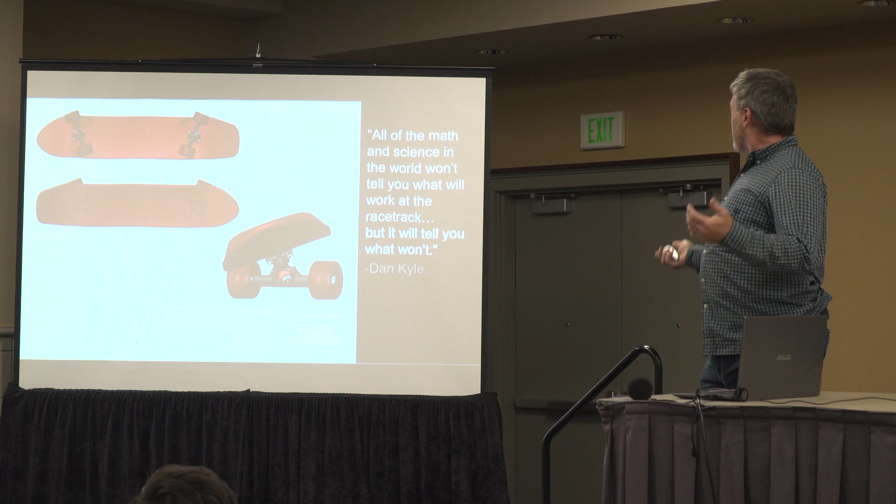Okay, so we're going to talk about this stuff. Here we go. All the math and science in the world won't tell you what will work at the racetrack, but it will tell you what won't. We just talked about that. We got a big problem in cycling, okay?

It's largely a marketing problem, right? No one really succeeds because they're doing better engineering, unless it's saving them money in production somehow or with shipping problems. It's a marketing-driven business. Like I like to say, it's 95% marketing, 5% manufacturing, the rest is engineering.

We have a problem in that most of what people have learned or know about bicycles has come from the marketing and sales department. All those magazine articles you've read, talking about bike geometry or wheels or whatever, were designed to do one thing: maximize the value of the advertiser's dollar. That's how magazines earn their money. Their goal is to sell shit.

They don't care if you learn anything. Or actually, one thing they do want you to learn is to buy their advertiser's product. So generally what you're reading when you read a technical article in a magazine is ad copy supplied by the marketing department of the manufacturer. That is how it works. And it's very difficult to have a real honest discussion that isn't geared towards selling stuff.

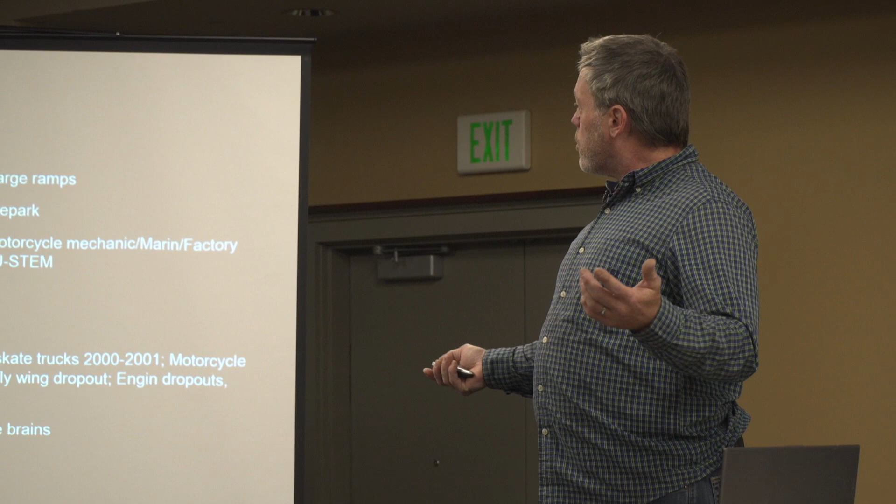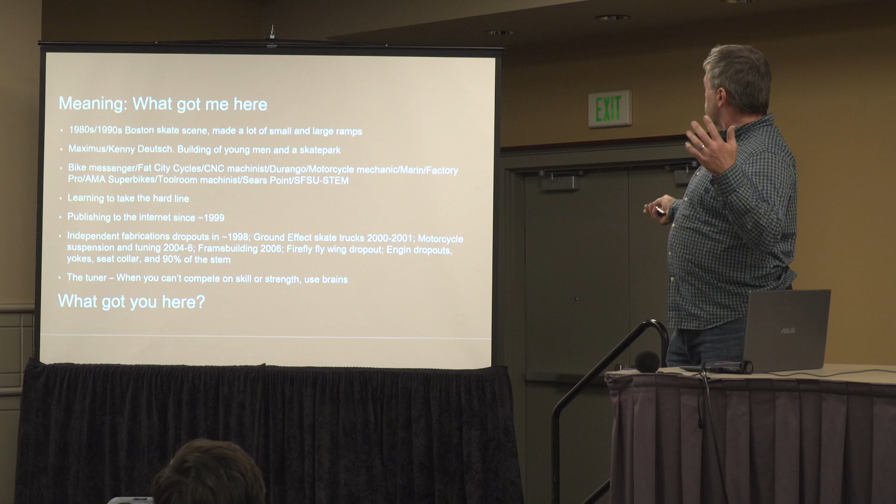For me, what got me here: I was a skateboarder in Boston, a Maximus guy. Kenny Deutsch was one of our mentors back then, if you know ancient history of Boston. Then I was a bike messenger, I worked at Fat City Cycles, became a machinist, moved to Durango right in the middle of all that. Worked as a motorcycle mechanic, came to California, worked at superbikes. A bunch of my friends started a fancy company. I did my stuff with skateboard stuff, started designing parts, got into real motorcycle tuning and things.

I think it's important if you're in these worlds and trying to churn around making bikes, or thinking about bikes on grander levels, to ask: what got you here? What's your path and what's motivating you to spend all this money?

We talked earlier about your huge motivator — it's a very tall fellow here. I can guarantee almost nothing available is going to fit him on a retail level. He needs a custom built bike. The only custom builders I know that specifically market to tall people probably aren't building very good bikes, and he wants a good bike. So this guy, right off the bat, very simple — you've got a damn good reason to build bikes.

What do you guys got? Why are you going to do it? It's hard work, it's very expensive. I've got a proven thing that's my bag — I call it tilt steer vehicles: bicycles, motorcycles, and skateboards. The rider is a mechanical part of the system, and they play a huge role in how the dynamics work. That's my bag.

With that, we're going to talk about authenticity, truth, values, and status. Status is huge for us, and it's a big topic in a lot of the thinky stuff happening these days. What is our motivation for doing stuff, especially in the Instagram world? I know I'm going to get to engineering soon, but this is important, because you don't want to get into this stuff willy-nilly, like you're just trying to boost your status somehow. Don't get around it — it sounds shallow, but that's the game. We're boosting our status within society somehow.

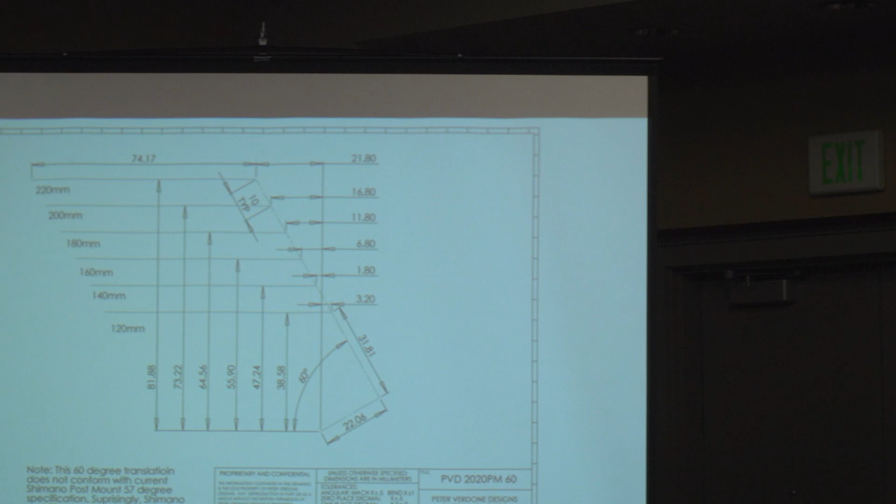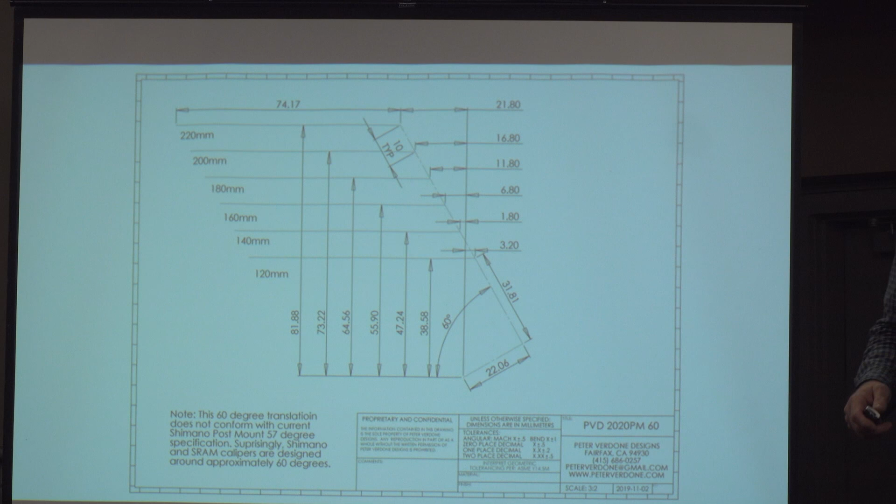Here's an example of an interesting problem: post-mount brake caliper mounting, something I dealt with a bunch a few years ago. If anybody here is well-versed in brake caliper methodology, it's an absolute train wreck. It's horrific, and the horrific part is I think Shimano, who largely defined this system, their documentation department and their engineering department don't talk to each other. The person who defined the standard didn't seem to know how the system was supposed to function. So we ended up with this total cluster.

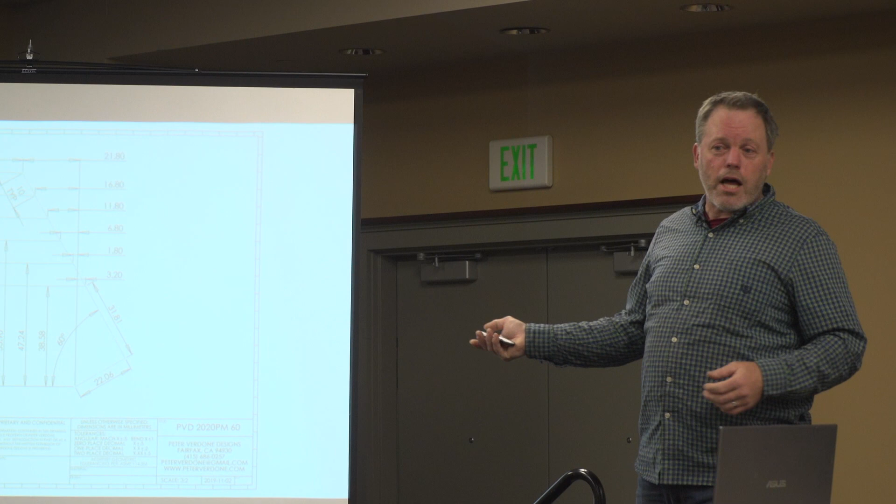This especially started with Manitou with their first fork mount, and then Shimano basically took it over, so you've got a bunch of things going on there. I redefined that in a way that makes sense methodologically. It produces accuracy and it can be extended in any way.

What is the problem I'm trying to solve? This system doesn't make sense. I need it to make sense. That's the context that I like to work in. So I redefined that, and the system still works. It'll work with any system that's going on right now.

What you'll notice here is it's changed from the Shimano system. Shimano defines a 57-degree angle if you were to systematize it. This is a 60-degree system that SRAM stays truer to. I think currently, paying attention to the SRAM specification makes much more sense for anybody engineering stuff around the system than the Shimano stuff. But if you take apart Shimano calipers and look at the angle they're functioning at, you'll see they're probably functioning at about a 60-degree angle anyway. So the reality is this system works pretty darn good.

This spacing here is 10 millimeters. 10 millimeters of the radius corresponds to 20 millimeters in the diameter, which is the steps we're working up. So we've got a true system. Anybody know motorsports with radial mount calipers? That's in a way what I'm looking for on a bicycle, but because of the space and mass that a true radial mount caliper system would require, we can't really use that, but we can at least base our system intelligently. That's sort of what I was harking to when I developed this.

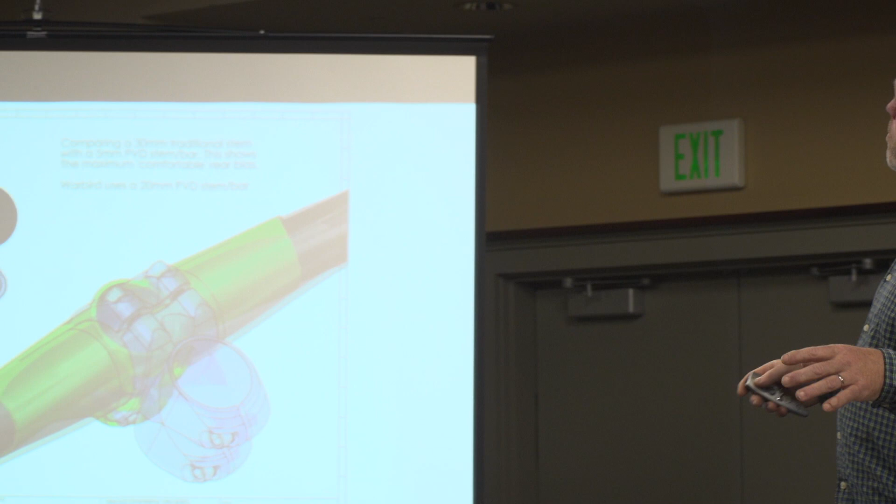If anybody knows my work, I've done a lot of work with the handlebar system, and that's stuff we're probably going to see from major manufacturers in the next few years in the performance end of the flat bar market. If you look at the handlebar end position of my system, which is green, versus the traditional, say, 30 millimeter stem shaded out here, the end of the handlebar is approximately the same with a 9-degree bend here.

But if you look, I'm allowed 36 millimeters more shift forward where my head tube can move. If you know about modern bike design, we'll talk a little about that maybe, we're moving the front wheel so much more forward that traditional handlebars and stems don't function. We're building bikes largely around the stem and not the wheel. The stem doesn't mean anything, the wheel means everything, the hand grips mean everything. Why are we defining the front end by something that's meaningless that happens in between?

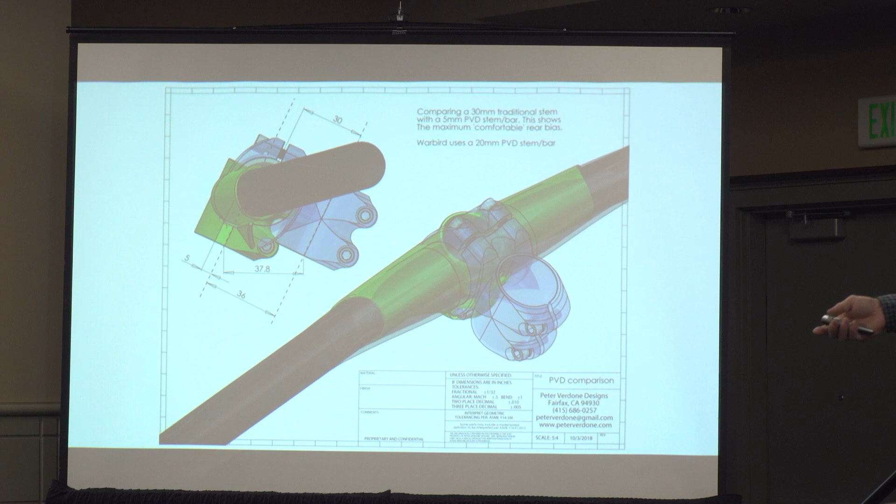So I'm just trying to show I had a problem: my wheel wasn't where I wanted it to go. I had to decouple my front wheel from my stem so I could have my grips where I want them, my wheel where I want them. That's what mattered, and the stem sort of morphed into this, and that solved the problem.

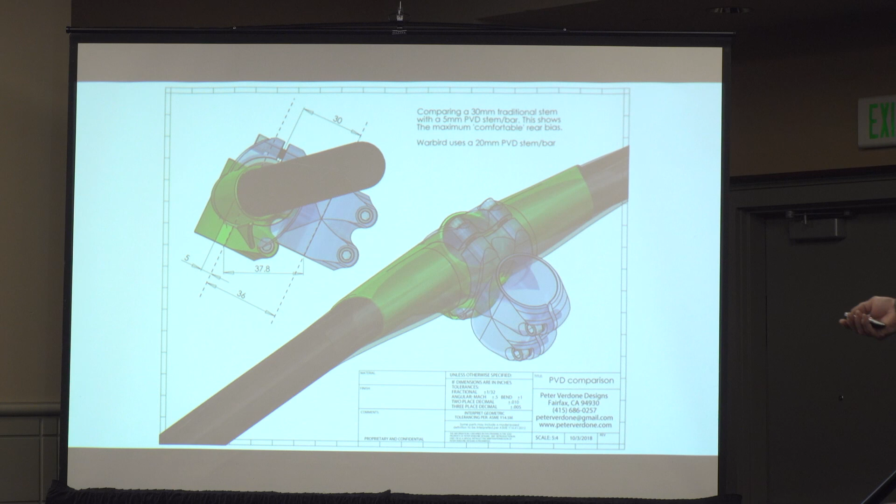And that's why I went down this road. You don't do this stuff willingly - I got a lot of flack about this. It's that whole thing of, are you willing to lose status? How many people are laughing at Pete's stupid looking stem thing here? Well, don't worry, I give them about 5 years and they'll tell me they knew all along.

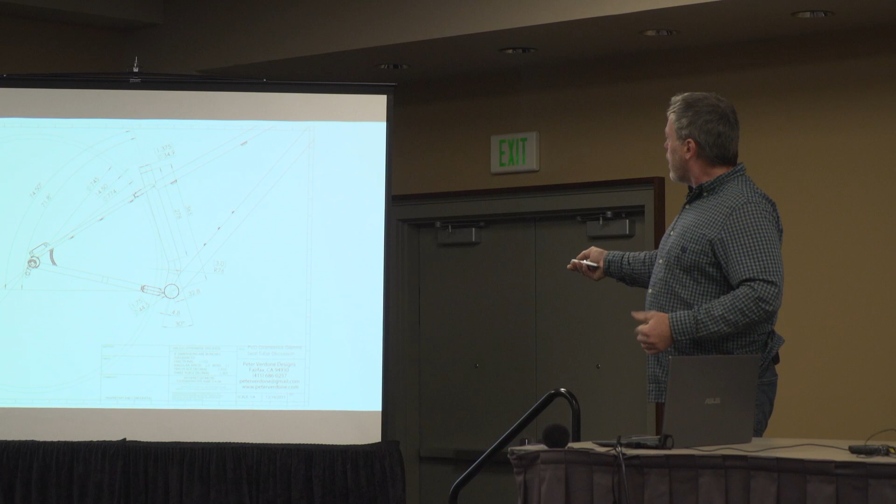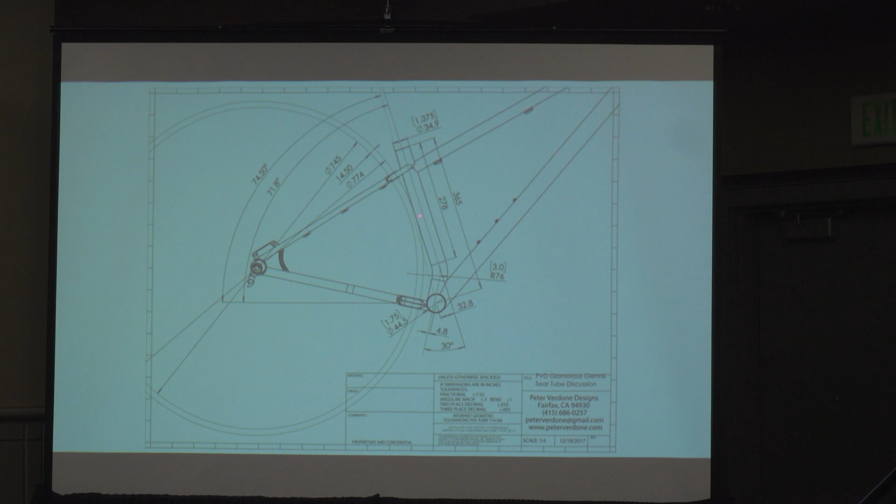Here's another solution in terms of the bent seat tube stuff. I did a lot of work to define how we bend seat tubes within mountain bikes and all-road bikes, essentially anything where you're looking for clearance back here. We look at our rim, our outside tire diameter, and a little mud clearance. Essentially the edge of our yoke or bridge, the seat tube and chainstay yoke or bridge should be tangent to that clearance line at the 3 points. But we're looking for dropper post clearance, so we want to maximize the straight section here, in the current vernacular, in terms of how we attach our saddle to the bike. So we need to have this room. Later that will change because this is a dying system and we'll be going to a linkage system, but for now this is where we're at.

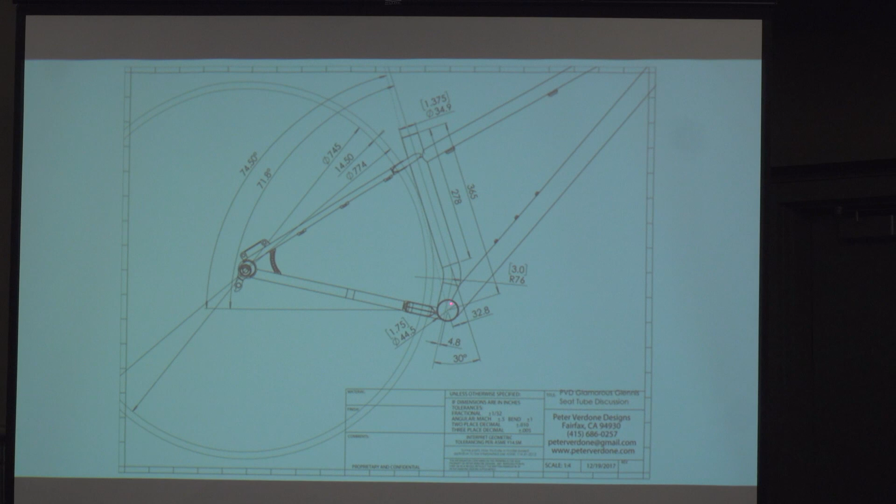So we put a really tight bend right at the bottom. For a while I was doing a very fancy and expensive bend - Rody knows all about bending tubes - and a 3-inch bend on a 1 3/8 tube is very challenging and expensive. Now with 3D printing, like I discussed, I can do a zero centerline bend for that tube and buy myself an additional 20 millimeters of seat tube.

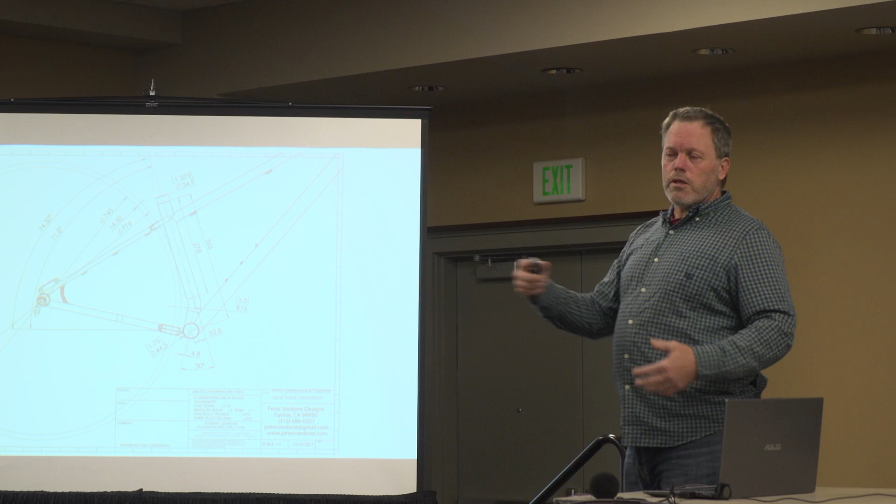Currently, when we're looking at dropper post stroke, which takes up most of this room or allows for most of this room, we're looking for mountain bikes to be, for my size rider, average 5'10", about 250 millimeters. And surprisingly, for all-road or gravel bikes, we're probably looking at about the same. Once people get into higher speed, off-camber and flat corners, you're going to want to be steering your gravel bike more like a motorcycle, where you're shifting your body and you need that translation room. So we'll start to see gravel stuff really start to climb.

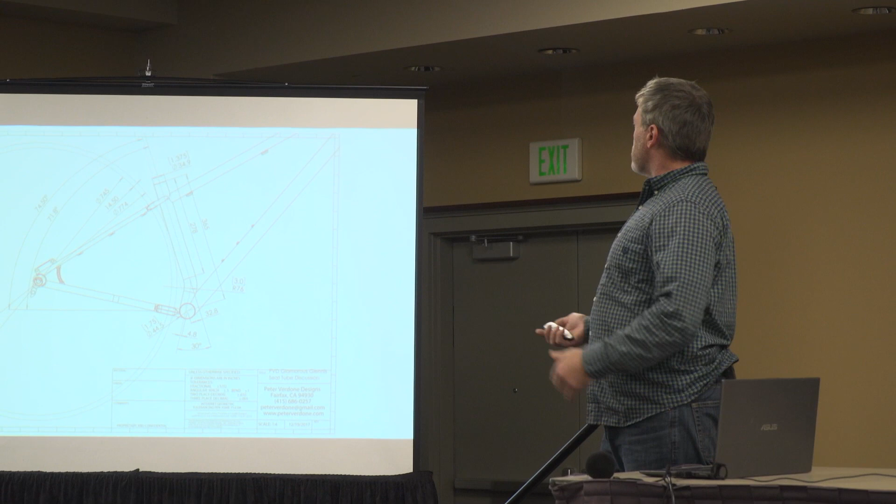Okay, risks and failures. So you're engineering, you're solving a problem, you think you're really cool, and you've got this great solution, and you start implementing it. Well, you've got risks and you've got failures.

The big thing here for more people than not: if your mistake kills somebody else, you're going to hell. I worked in motorsport, and in motorsport you've got a team of between 5 and say 20 people working to make sure one person is the fastest person of the day. And to do that, you put them in a very dangerous situation that relies on everything not failing so that they survive, assuming the worst doesn't happen. But the thing is, if you make something and it fails and somebody dies, you're gonna burn. That's just how it works.

So engineers start getting really uptight about being right or wrong, because somebody's life could be on the line because of some decision that you just thought was whatever, we'll just do this. And it's like, no, it really matters - someone could die, and that's important. So there's small stakes and low stakes poker, or small stakes and large stakes poker - if you're playing large stakes poker, you better be checking every little thing and making sure.

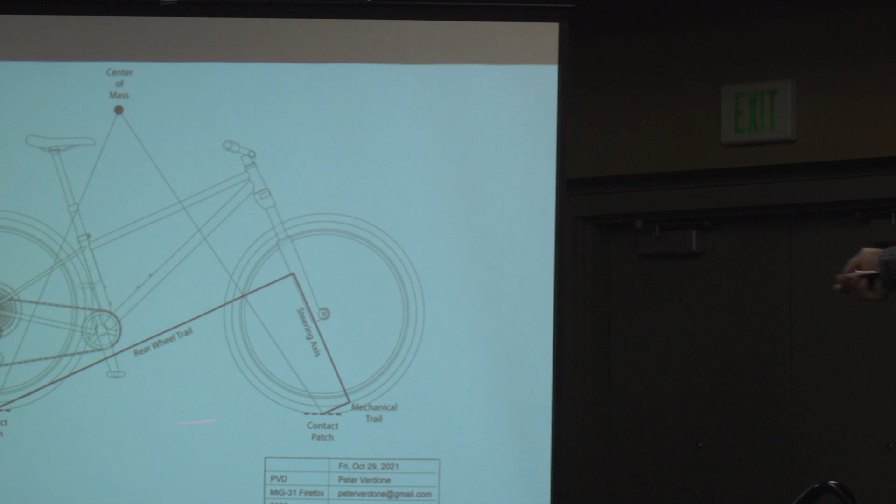say we're going up a hill or down a hill, this triangle will change. Granted, this center of mass will move somewhat. And this point here is based on some experimental data of mine. So that would be essentially me on my clunker, that's my center of mass.

But the thing is, that stability right here going in the front is largely our forward. When we talk about long front ends, when we talk about front center, really what we're trying to do is change the attitude of this line, or this angle from the center of mass to where the tire contacts the ground. That's vitally important to forward stability on a mountain bike, especially in rough terrain.

Anything that goes in the dirt is really nice. I say gravel bikes are also really advantaged by the up and down movement and freedom that's afforded by moving the front wheel forward. But this is the fundamental line drawing of the bicycle and how it works.

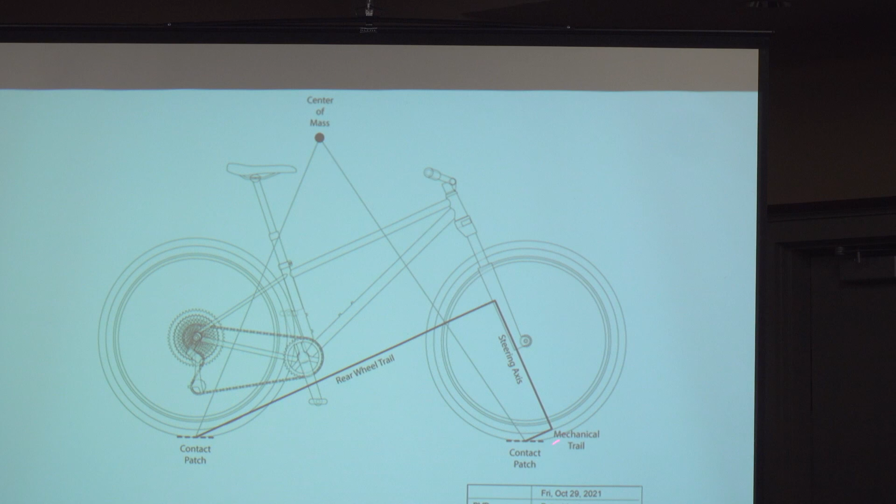And if you look at these straight lines and think about how a bike feels while you're flopping around, that's it right there. One thing that I didn't draw here, because I think it's kind of later down the process, is this vertical dimension here, we'd call flop. That's the potential of that system, when we talk about the potential energy or the displacement of the mass.

So if you let go of your handlebars, if we didn't have this friction created by the contact patch, that front end would flop right to the ground. Well, that distance, that potential that we have there, we call flop.

And I've found that more than trail, the length of the lever arm here, the mechanical trail, flop is becoming a bigger factor in terms of how we're drawing and designing our bikes. And I would say, rather than, we're pretty much fine with trail, we're in the ballpark, it doesn't matter at this point. Start thinking about flop, it's really important.

Here's the rest of the bike. So I added, this is a template of basically the dimensions I'm going to use when drawing the bike. Now, it might look like there's a lot here, but there's a lot that aren't here. Most importantly, you don't see any stack or reach numbers here. You don't see any effective top tube length here. You don't see any actual top tube length here.

That's because those numbers don't mean anything. They don't do anything in the design, and that's not what I'm looking at. I'm trying to understand what kind of cockpit fit up do I have.

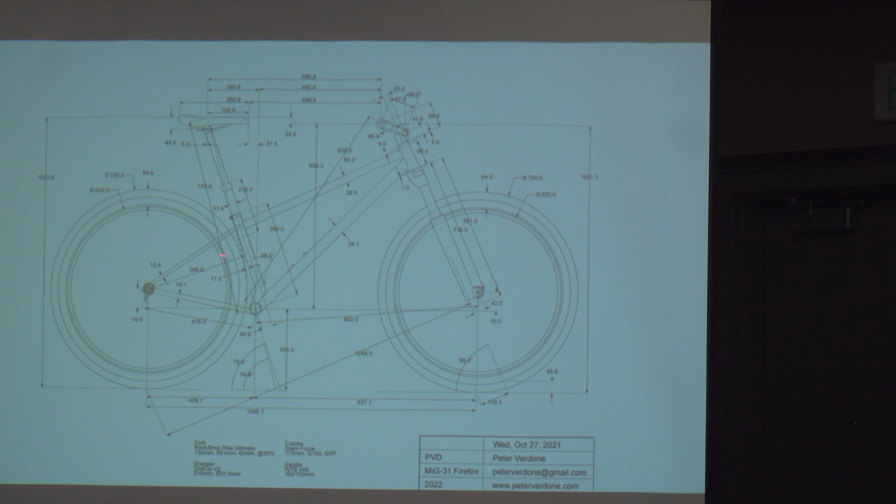This is the bike I'll be building later this winter. It's going to be shorter travel, a 160 fork mountain bike. Most of my mountain bikes recently have been 180 fork mountain bikes. You can see some of this later dimensioning here that we just added. I was talking with Brent a bunch before 17.5 came out about how to get this seat tube stuff really detailed right so that it's meaningful and important for frame builders.

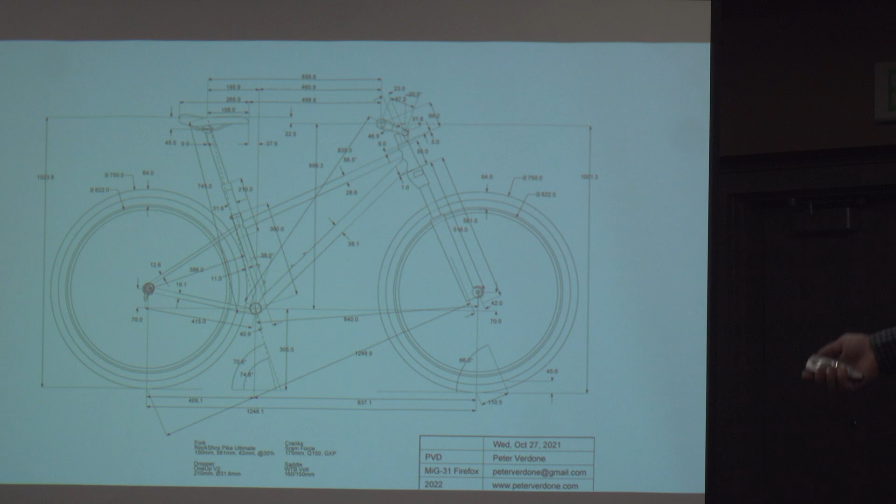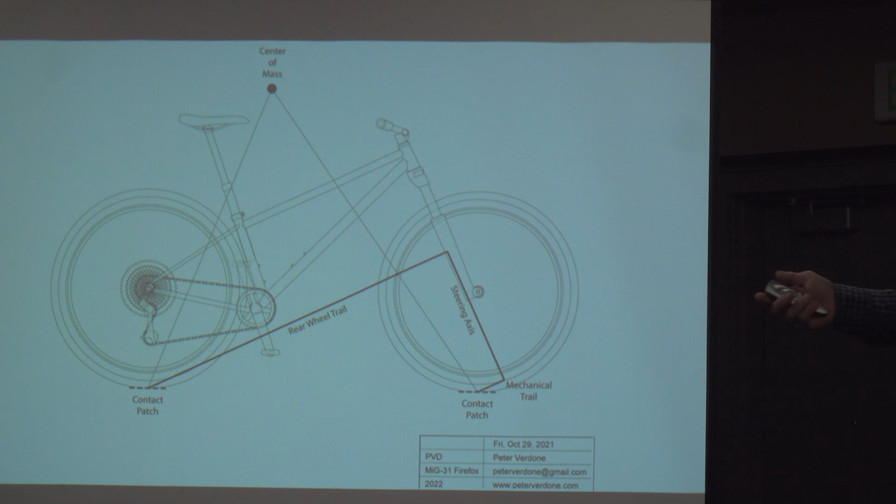Now, if we look back here, I was talking about this cockpit information where two things have to happen. We need to have a dynamic chassis that functions in an environment with that center of mass we talked about. That has to happen - that's the bike going down the road or down the trail. But we also need to get the person on the bike, so where the saddle is and where the handlebars are in relationship to the pedals, which I need to have a circle there where our pedals are. That's how we contact the bike, the touch points - those are important for how we interface with the machine.

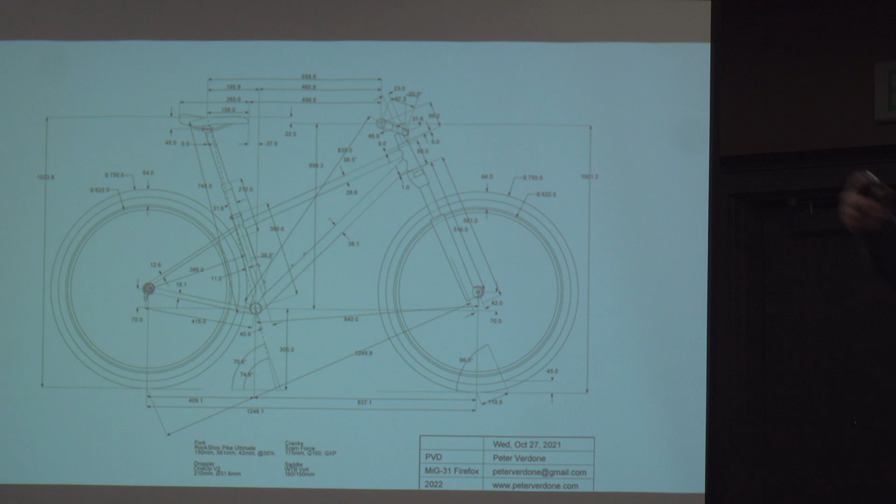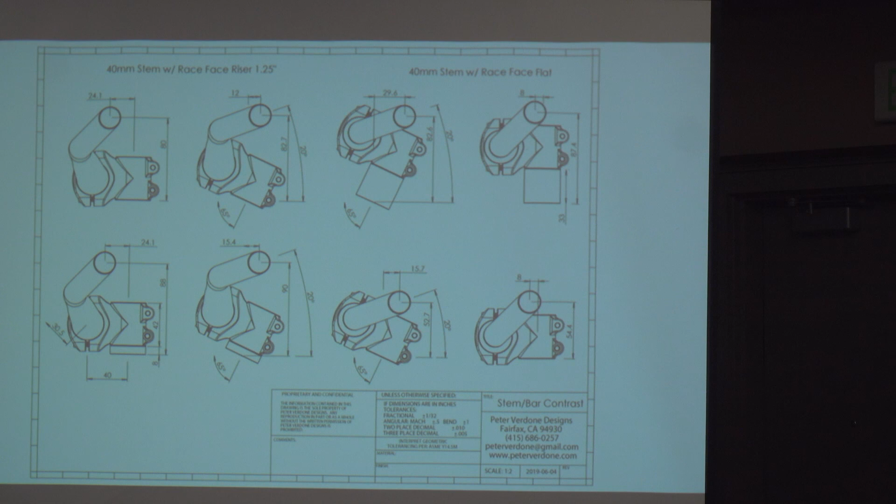One thing I've seen a great many frame builders do is completely ghost out that part of the bike. They start talking about stack and reach, they start talking about top tube length, but what they're not talking about is really fitting the frame to the rider in a way that is special for them. A lot of that comes out of a misunderstanding and not having gone down the exploration of how the stem and handlebar area affects the geometry of the bike.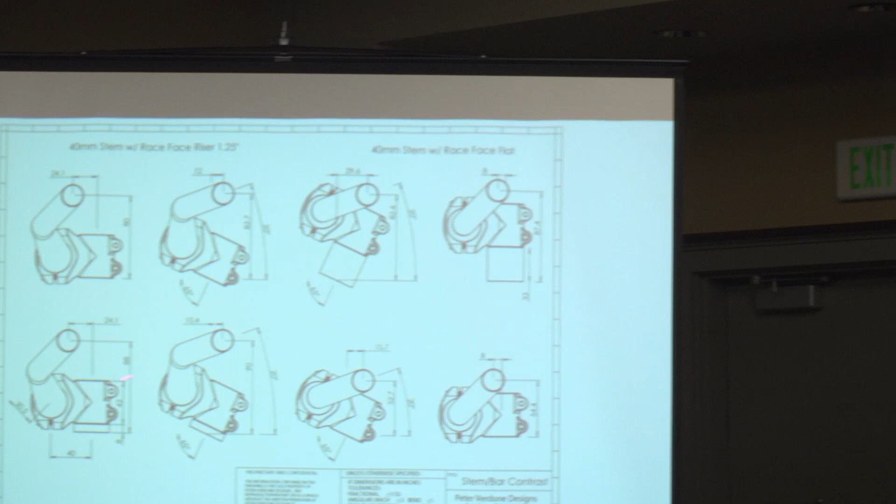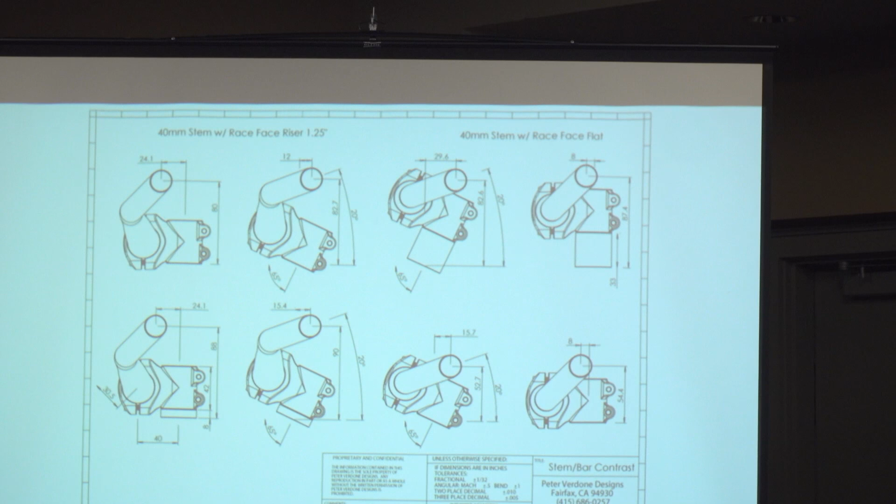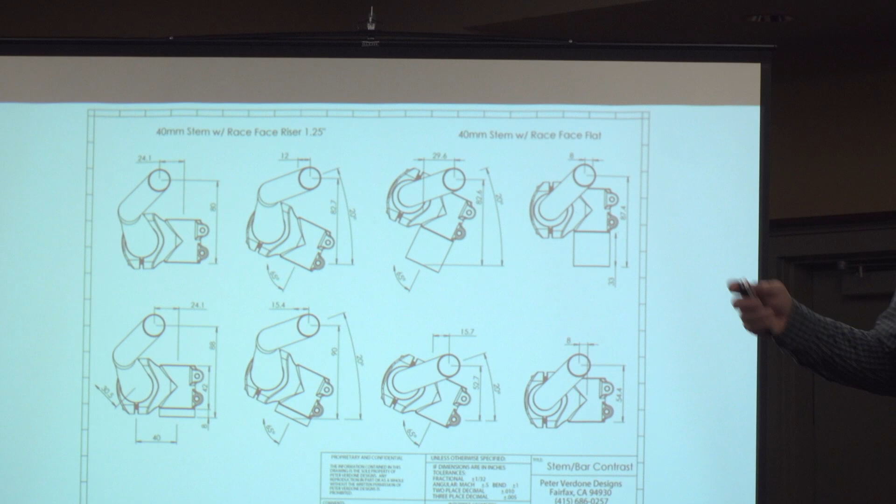You can see here just some rough measurements. This is mostly 9-degree handlebars and how much displacement, vertical, between sitting on the countertop versus sitting on a bike. I found personally that for my general size riders, I'm looking for a 20-degree from horizon up sweep angle. You can approximate that by pointing at your center of mass, which you can approximate by your belly button - you want to know where most of the mass is, it's about right there. So when you're on the trail, you want to place your sweep angle right - just point the sweep toward your belly button. It works really well, gets you in the ballpark, and starts setting you up.

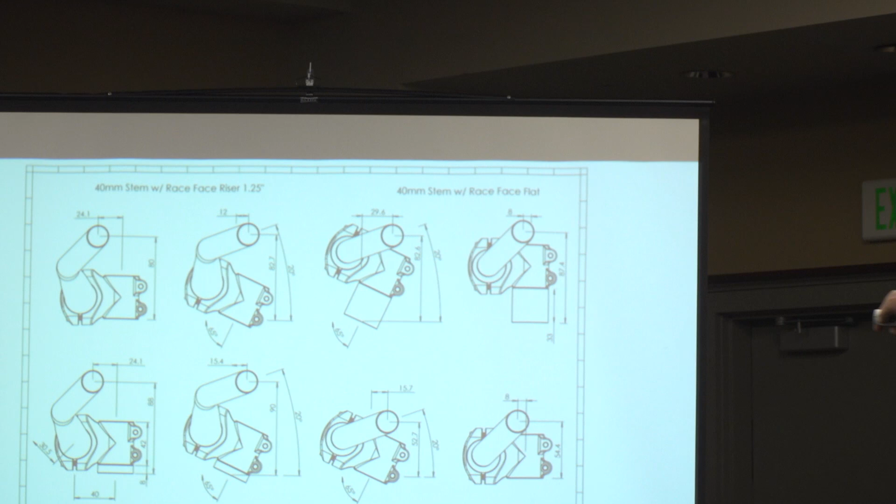A lot of these numbers, if you start really measuring your handlebars and stuff - oh yeah, this is a 65-degree head angle I wrote there, with these different handlebars and stems - these numbers are important. If you haven't put these values in a meaningful way into BikeCAD, you're going to end up with weird fits. I don't know anybody who's been making bikes and working with BikeCAD who goes 'why does this bike work so differently, I expected some different results' - it's probably because you're really screwing up here. I would say go through all the settings and get your stuff as accurate as possible so that you can have reproducible results from bike to bike.

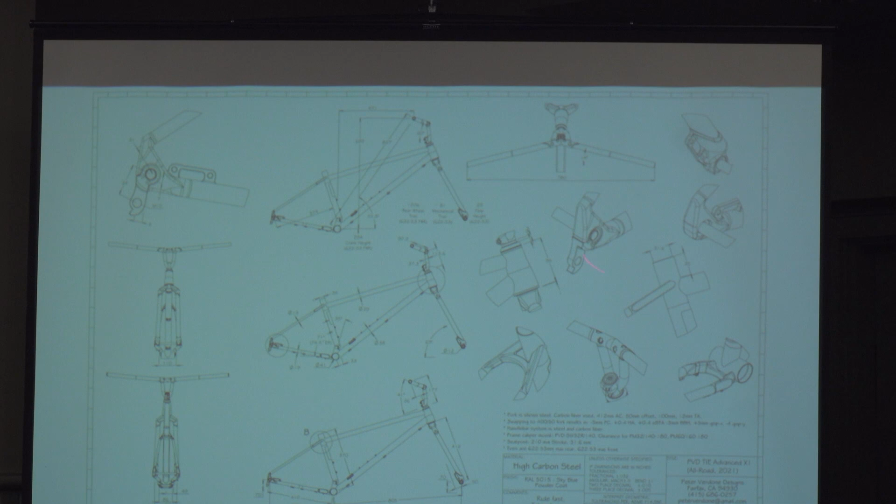We can see perspectives and various other dimensions and interesting dropout configurations. Metrology -- we need to measure stuff. Anything we do, we need to measure. We have calipers, micrometers, gauging comparison, all this sort of stuff.

One cool thing I've learned over the years is using the DRO of a milling machine as, in a way, a ghetto CMM, where you can set something up in your mill and find center hole locations using the XY readout, measuring something you might not have had any other way to measure in your shop, since of course you don't have a CMM laying around.

Also imaginary measurements, like handlebars sweeping to your belly button, or you can only ride as fast as you can look ahead, or flat light is darkness, because we really stop learning anything once light goes flat. Those are things we gauge that are kind of imaginary, but they're useful, and we need to understand that stuff.

Reverse engineering -- just copy the work of others, start there. That's a really good way to do it, but you really want to understand what they were doing. Reverse engineering helps guide a novice designer into understanding what might have gone into the minds of someone who might know better.

3D scanning is getting really big right now. We have several types of 3D scanning -- most of it's LiDAR based, but we have the rad stuff. CT scanning is like, oh my God -- you can do QC on a tray of 1,000 parts in like 2 seconds. It's nuts what can happen with CT. There's also white and blue light scanning and stuff like that.

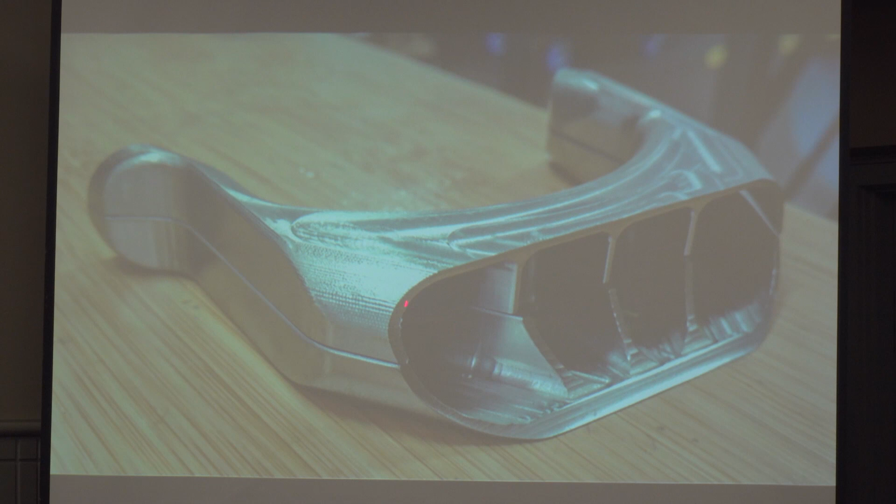Here's just a 3-axis CNC type of part. Very expensive here, where we got some rounded edges, internal webbing and everything, where we have radii at the bottom. There's things that you want from a mechanical engineering standpoint, this really makes it strong, but you've just doubled the cost of the part.

Economics are a powerful and huge force in engineering. We talk a lot about materials, numbers, math and physics. Economics comes ahead of all that stuff. Money and time are huge. And this type of machining is very, very expensive. So you really want to choose your battles. That's what's going on here.

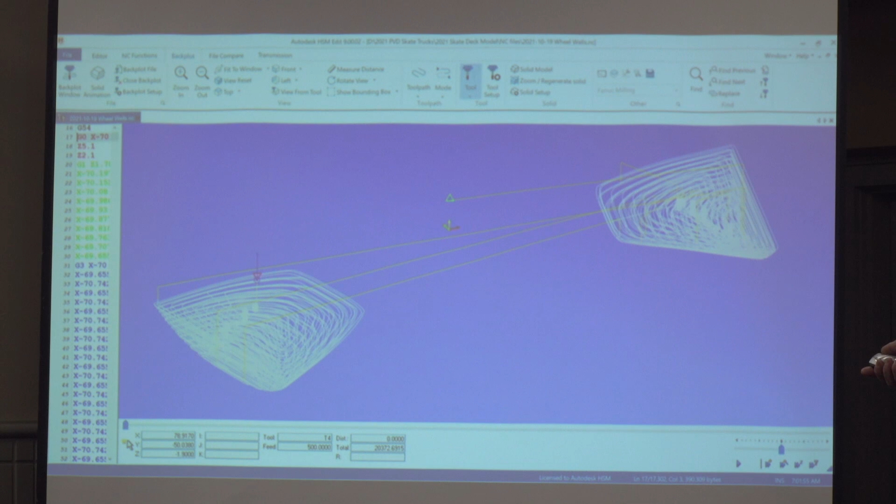This is just a Grbl environment where I was machining the wheel wells for the skateboard on a $150 Chinese CNC machine. Terrible machine, but it got the part done. Here's just basic tool paths and G-code, that kind of environment. These are interesting things to work with.

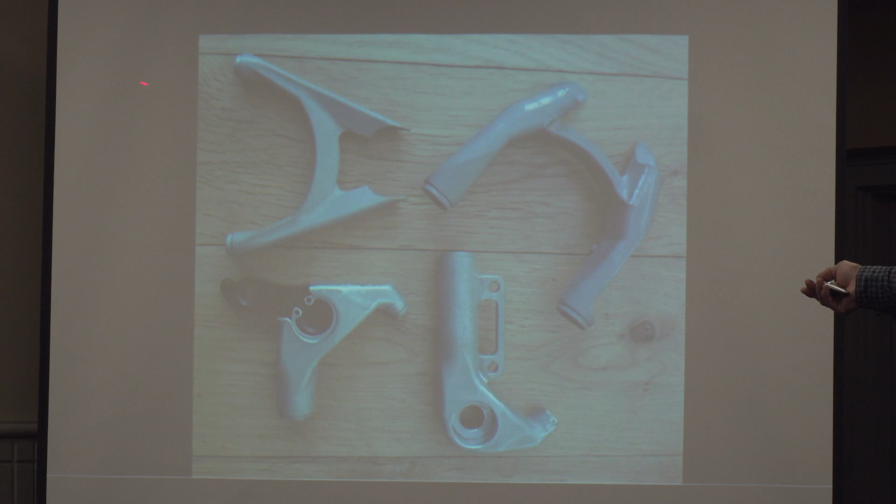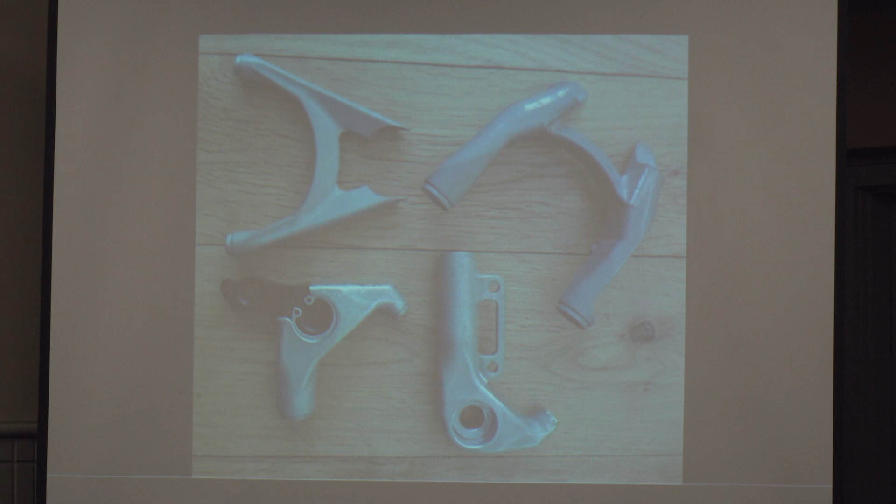It's really getting to be available now, where for a long time 3D printing in metal was a thing, but it only existed for Boeing. It only existed if you were a defense contractor. But we're starting to get it to the point where we can really make it worth something.

But we really want to maximize the value we're getting. If you can use water jet instead of 3D printing, use water jet. Definitely, that's a better place to go. That's great money spent, and it teaches you a lot, working with vendors, the importance of drawing.

Swear to God, how many times have I done a model? I've spent all this time killing myself with my solid model, and just because I'm old school, and kids these days don't do it so much, but I'm preparing a 2D drawing to go along with my solid model to give it to my machinist guy, and I catch something totally wrong while preparing a 2D drawing that exists in my 3D. It's like, oh my gosh, thank God I was preparing the 2D, because it kind of gets you into a whole new environment to look at your part and really say this is what's what, and you can catch a lot of problems that way.

Working with vendors, Mark at Paragon is a huge resource for people in terms of what he does. If you can order a part from Mark, you're doing yourself a huge favor. It saves you so much money and time to rely on his expertise and economy of scale to get parts that are really good and very well priced for what you're trying to do. He provides 2D drawings and some 3D models that can help you integrate it into a 3D environment. Also, there's some integration with BikeCAD, so you know what it looks like in a 2D environment.

It's a very important resource, but also we have other machine shops around. So if you have something special and Mark can't do it for some reason, or he works at a certain scale, you have local bros—maybe they're starting a machine shop and they need some work. There's remote machine shops I haven't exploited much, because I think there is real value in being able to walk into the machine shop and talk to your machinist. They are a huge resource for the designer or the engineer, because they'll call your bullshit. That's what machinists are supposed to do, and they don't want to waste their day making junk parts.

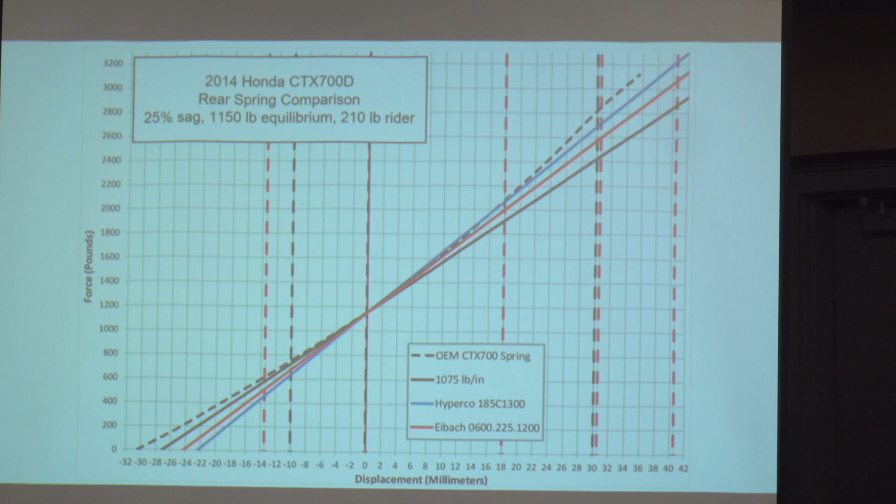Development. Here's how we traditionally look at this - rear springs for a motorcycle, CTX 700, that I'm currently riding. I was doing some spring work, talking about equilibrium states for various spring rates in the system and how it affects it. This is a fairly traditional view of looking at springs in a suspension system.

But in development, we talk about something different. I haven't done a lot with suspension recently, but thinking about, instead of displacement and equilibrium with forces in a suspension system, how about instead looking at what kind of energy is being stored in the system, and how to better predict what spring rate we want based on the energy the system needs to consume. That's a fairly interesting way of looking at the problem.

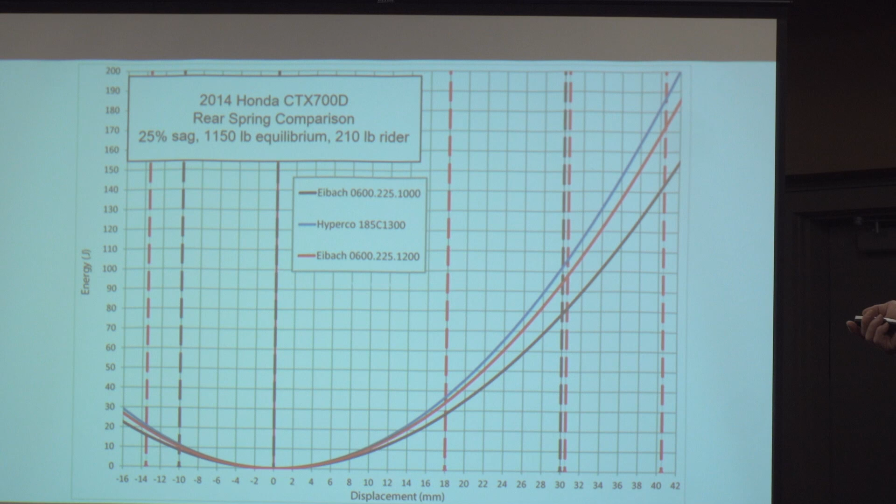When we have these frameworks and can start looking at energy rather than just force and displacement, we might be able to learn something. And these are the paths you want to go down on your development track.

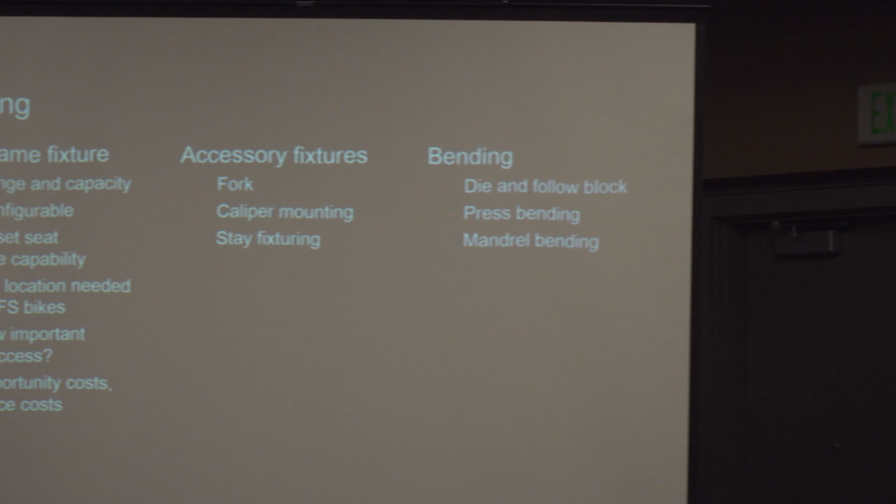Tooling. You want to build bikes, you need a frame fixture. I talked at length about Arctos frame fixtures earlier today. And different frame fixture environments have different values to builders depending on what your needs are.

The needs of a builder using lugs on a fairly traditional design is very different from mine, where I'm looking for a coordinate system to build pivots from, or some very complex setups for different parts of the bike. I need to work with a table or a whole different fixture type, and what kind of access issues we have. We have accessory fixtures where we have forks.

Stay fixturing is a brutal detail that a lot of builders fight with. Caliper mounting, I was talking earlier about caliper systems. If a system is erratic and doesn't function according to any methodology, it's very difficult to build flexible fixtures that can work with a 120 millimeter rotor or a 220 millimeter rotor if the numbers are all bouncing around in space, when they definitely can't from a mechanical point of view.

And then bending, this is the big one. We were talking to Rody earlier today, that guy over there, he's got 4 different bending systems in his shop. Most builders wish they had one, you know? He's definitely put a lot of work into this: die and follow block, press bending, mandrel bending, and different types of bending like that.

Sometimes you can just send your bending out of shop. That's how I did my seat tubes that had a 3-inch center line radius on a 1 3/8 tube, an insane bend that nobody without a $1 million mandrel bender is going to do. But I had somebody with a $1 million mandrel bender do it, because I wanted to solve that problem that bad. It was really important.

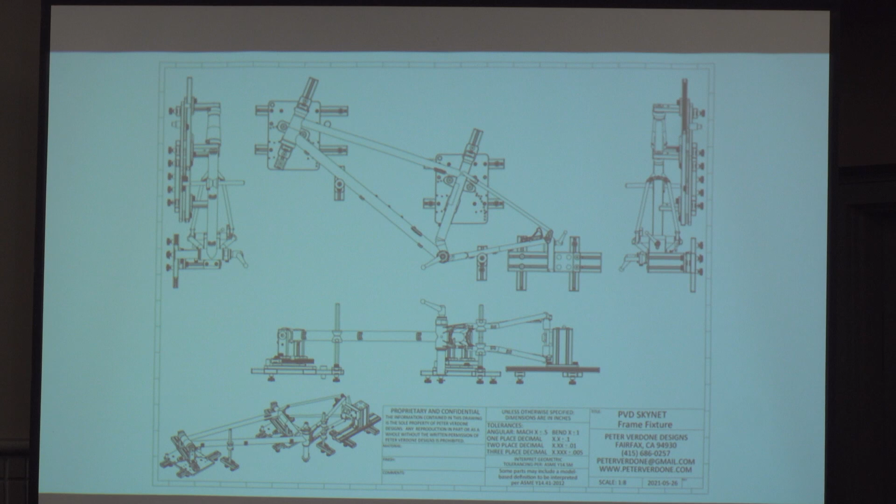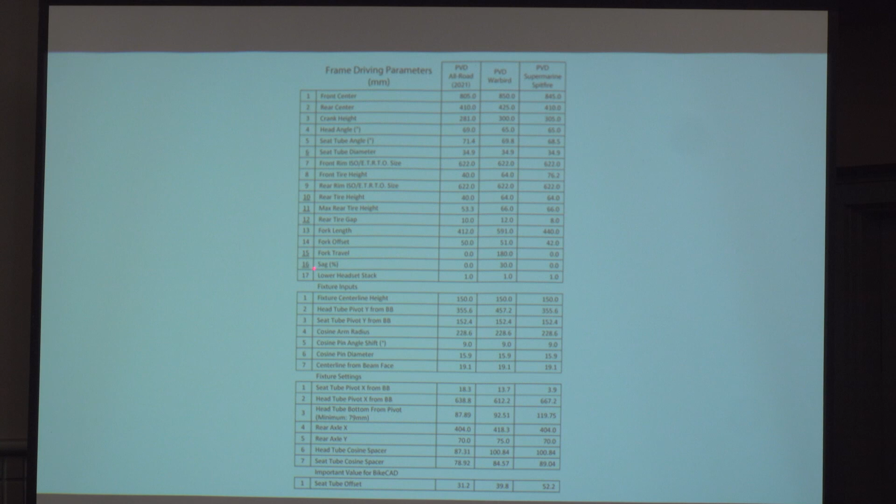What I think is very interesting here, this is assuming you might have a bent seat tube and different size front and rear wheels and tires. But if you had a straight seat tube and the same size wheels and tires, this list of 17 goes down to 9 parameters.

When we talk about refining and figuring out what are truly driving and driven parameters, when you start simplifying systems and you've dissolved it down to very simple levels, you're probably working with the real numbers. Someone might want to make an argument for top tube length with me, and I'll be like, show me how that works, how does the math work? And they're going to show me some really complex bullshit relying on a whole bunch of crap. And it's like, no dude, the math's simpler with this. That's the truth.

Materials, I'm not going to talk much about materials because that could fill up a whole other day, but be very intentional. Steel is a shitty material to work with, except for all the others. People say steel is real, that's half the sentence. The whole sentence is steel is real easy. So we work with steel. Were it my dream, I'd be working with aluminum and carbon fiber mixed together, but that requires a whole bunch of stuff.

Titanium's a really terrible material for prototyping, is one thing I will say. Titanium is very expensive, and it's very hard to machine, and welding it requires a considerable investment. So I would say, even if you are going to be doing titanium building as your whole plan, prototype with steel. Just churn that shit out. It's cheap, it's easy, you can bang it out, and when you've got all the pimples worked out and your muling and testing worked out, then go to the fancy material, because your time and money are better spent that way. I'm not saying which material you should work with, just that it's not a very good environment to be prototyping in.